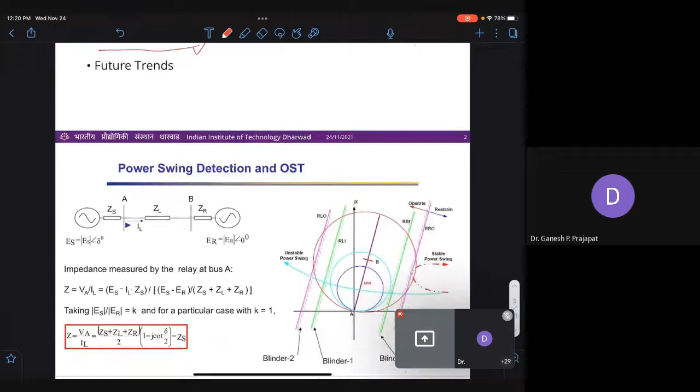Before going into AI applications to stability studies, let's discuss some basics first. Traditionally, how do we detect unstable events? Suppose you have a large power system with many generators.

Suppose after a fault, one area is separating out from the other area, so this area goes out of step with respect to the other. These two areas we can represent with two single machines, two sources. After a fault, if it is a stable fault, the oscillations or the angle difference will die out after a certain time. If it is an unstable fault and the system becomes unstable, the angle difference increases like this.

Now in traditional power systems, how do we detect this unstable case? If you have a relay here, say a distance relay, it can measure the distance, or impedance. You can see this is VA by IL, which is what it measures as distance.

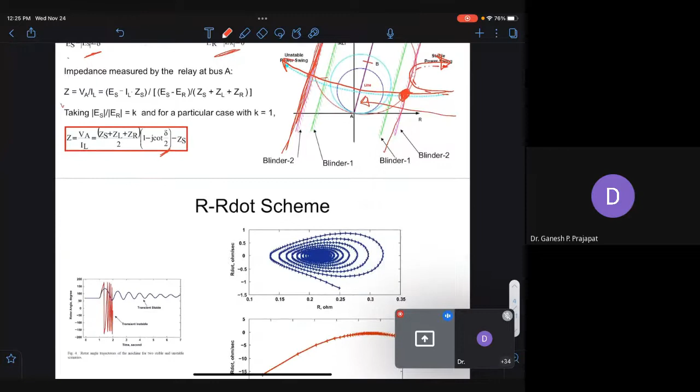Once it crosses this blinder, you can put a timer, and within a certain amount of time it will cross the other blinder. During a fault also it can enter here, so now we have to classify between a fault and an unstable swing. This is done using the R and R-dot scheme. Generally for a fault it will be very fast, and for an unstable swing it will be slower than that.

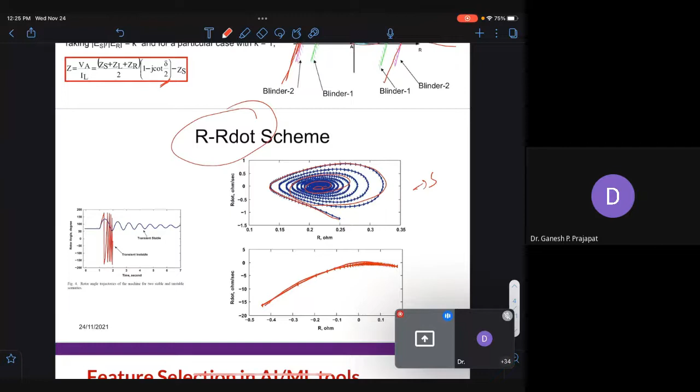For the R and R-dot scheme, you can see that for a stable swing, it looks like this. And for an unstable swing, the R and R-dot trajectory is different, where R is the resistance, the real part of the impedance seen by the relay.

So this is R, and the time derivative of this resistance is R dot. If you plot this, this is your stable case and this is your unstable case. So you can put a threshold to identify stable and unstable cases, and if it is unstable, you can separate the two areas.

If you have one area separating from another, suppose this is the out-of-step generator, and this is your stable area, so you can separate out these two areas. That is basically islanding. Now, because of renewable penetration, as the inertias are changing, your R dot, the time derivative of this resistance, will also change, because as the inertia changes, your oscillation frequency changes, and because of that you get this change in R dot.

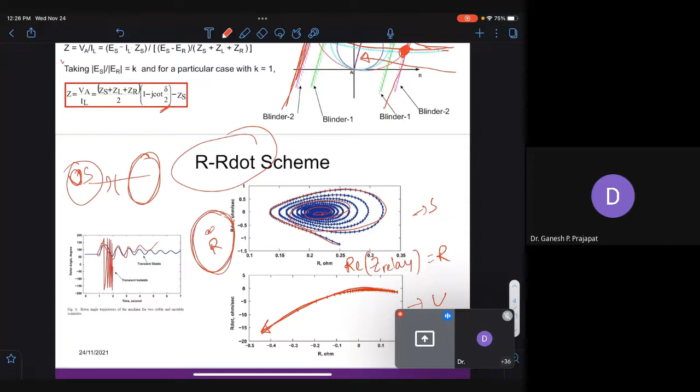So there are many difficulties to set a proper threshold now. We can use machine learning tools to identify whether the fault will be stable or unstable, that is, after a fault, whether the system will remain stable or unstable. Now, how do we select features in the artificial intelligence or machine learning tools? It needs some features, some measurement features you give, and then it gives you the stable and unstable status.

So here you can see this is a single machine. In fact, this is also basics. It is required to understand how we can use AI/ML tools in transient stability predictions. So here it is, you can see there is an SMIB case. So if you have a two machine system or two area system, one area is getting out of step from the other area.

So you can represent it with generators, and from a two machine system you can represent it with a single machine infinite bus equivalent. Now we are familiar with this equal area criterion.

Now you can see this is your P-delta curve pre-fault, and initially your mechanical power or electrical power is this one, PM. Initial angle is delta. If there is a fault in the middle of the line, you can see that during the fault your P-delta curve reduces to this. So mechanical power is this and electrical power is less, so the generator rotor accelerates. This is your accelerating zone.

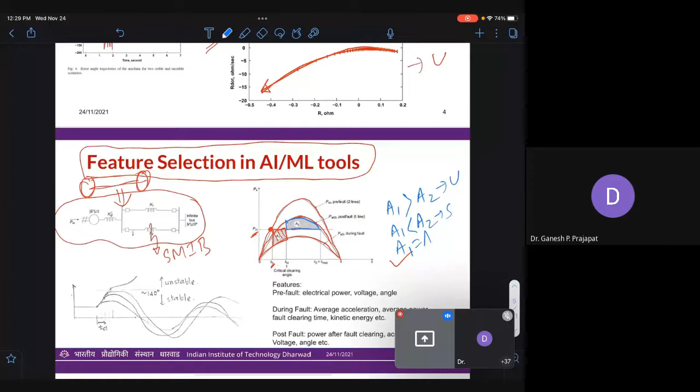Now, how is this relevant to feature selection with AI/ML tools? How do we know whether A1 will be greater than A2 or not? This A1 can be characterized by this mechanical power, this electrical power during fault, and this angle difference. So three things determine area A1: electrical power pre-fault, the average electrical power during fault, and this angle difference, delta CR minus delta 0, which depends on the fault clearing time.

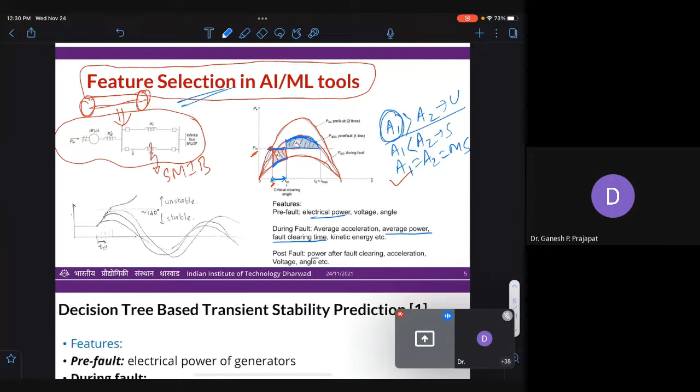Similarly, area A2 depends on a couple of factors: one is the electrical power after clearing the fault, and of course the mechanical power, that's the bottom part, plus electrical power pre-fault. Now, this electrical power after clearing the fault depends on voltages as well, right? So similarly, we can select voltage and angles, which also determine this pre-fault operating point as well as the post-fault operating point.

So these are the features used in machine learning tools: electrical power, voltage and angles, pre-fault and post-fault, and during fault we need the average electrical power, and sometimes average acceleration or kinetic energy. Not all features are used, you can use a subset, because generally if you use electrical power, you don't need voltage and angle, you'll get the same information even using only electrical power.

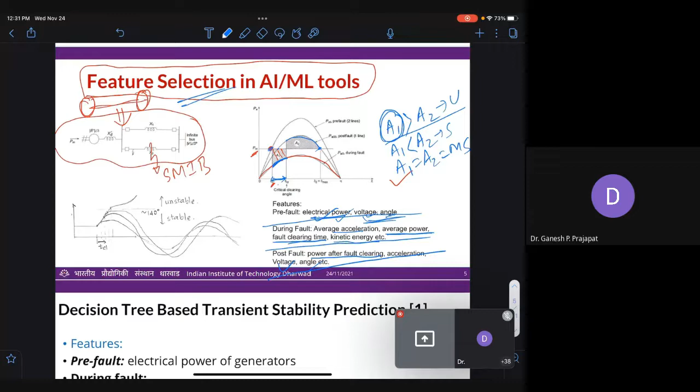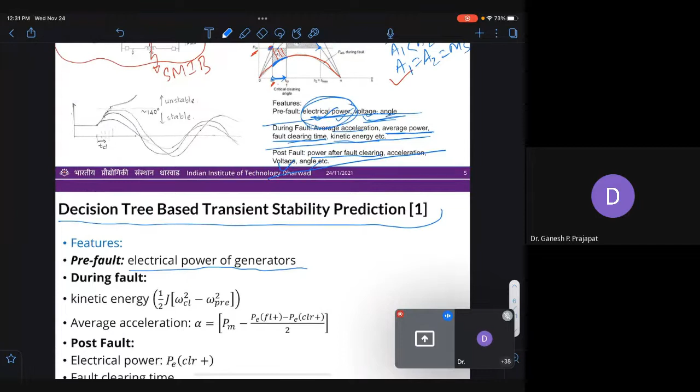So I'll give one example of decision tree based transient stability prediction. The features used are electrical power of the generators before the fault, you can see that feature. Then during fault, kinetic energy and average acceleration.

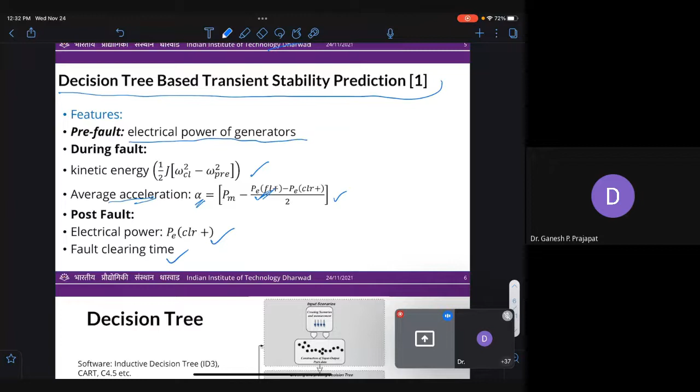When you use average acceleration, you can see that during fault your electrical power is also used. So basically we're using the same information, the during-fault electrical power, which is already used in calculating the average acceleration. Similarly, for post-fault electrical power and fault clearing time, these informations are used in the decision tree to predict transient stability. So how does the decision tree work?

You will have lots of simulation data. You'll be given power system operating data, loads and generation, and network information.

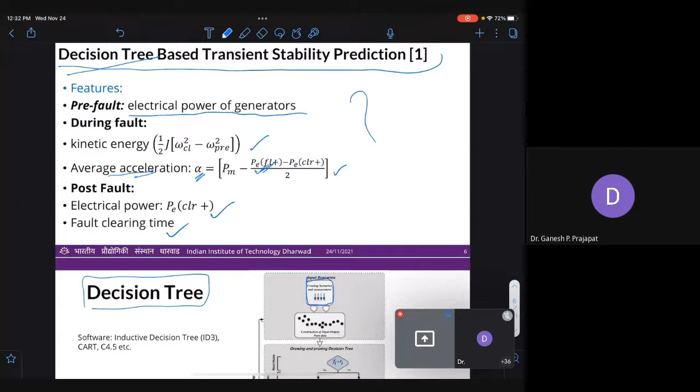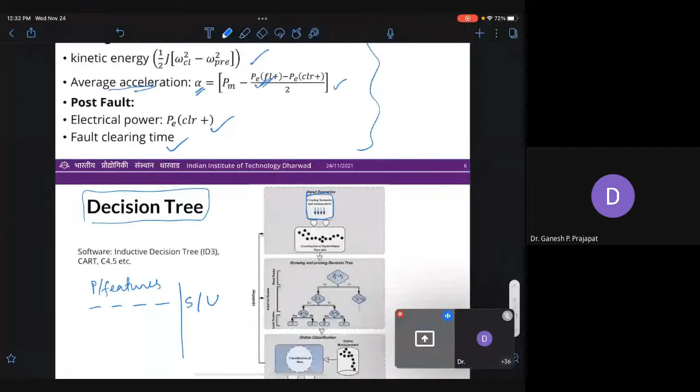So you will create many simulations, and for each simulation, you will calculate these features. Finally, after simulation, you will see whether it is a stable or unstable case. So you will have a number of predictors, and finally identify whether it is stable or unstable. Similarly, you will change the operating point, or create another fault and check. You calculate these features and see whether it is unstable or stable. You will create this database by doing thousands of simulations.

Then you can use software like C4.5, 5.0, or CART, which will give you a decision tree like this - an if-else kind of structure. So for one feature, if it is greater than a threshold Ti, you move in this direction; if not, you move in another direction. Finally, at the terminal node, you get whether it is stable or unstable. Now, if you have this decision tree, in real time, if you get some measurements, you can calculate these features and use them in the decision tree.

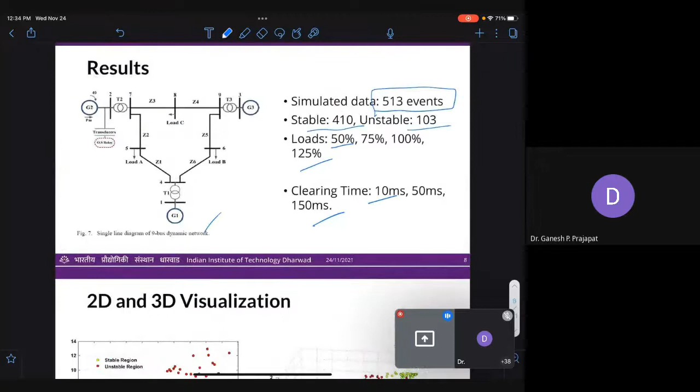It gives you the stability status of the power system, whether it will be stable or unstable. Now, this was tested on a 3 machine system. There are 513 simulation cases, with stable being 410 and unstable being 103 events. Loads were changed from 50% to 125%, and clearing time was changed from 10 milliseconds to 150 milliseconds. So a total of 513 events were simulated, and a decision tree was trained.

Now, if you use only two features - kinetic energy and average acceleration during fault - you can easily classify this: this is your unstable and this is your stable. But in this zone, it is difficult to classify using only two features. That's why you need to use multiple features, and then you will be able to train a decision tree properly.

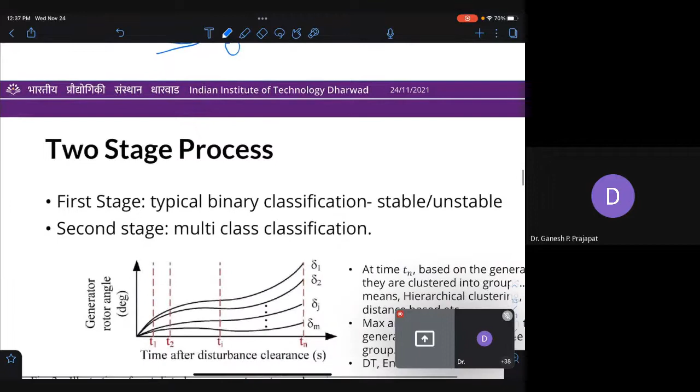So we need to know how the system behaves. This is a 2-stage process. The first stage is typically binary classification - stable or unstable. In the second stage, it is multi-class classification, where we need to know how the generators will behave. Suppose we simulate for around 20 seconds, which is sufficient and long enough to determine transient stability. So at 20 seconds, we look at how the generator rotor angles are clustered - for example, suppose generators 1 and 2 become unstable from the rest.

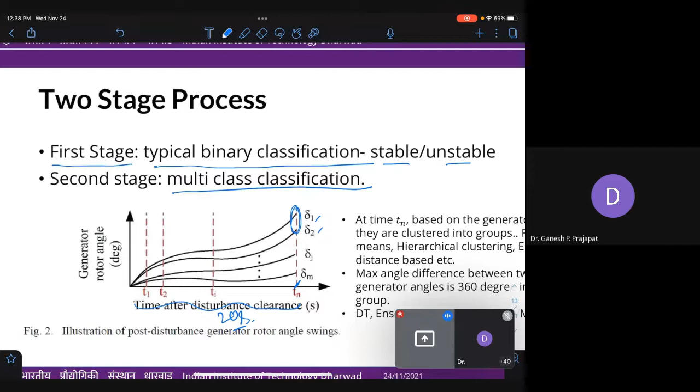So you will see that the angle of these two will be much higher than the other generator angles. After 20 seconds in the simulation data, we can classify and cluster the generators into several groups.

We can use fuzzy C-means clustering, hierarchical clustering, or Euclidean distance based clustering. We'll group these generators into different groups. Now the maximum angle difference between two generator angles is 360 degrees in each group, so within a group your maximum angle difference is 360 degrees.

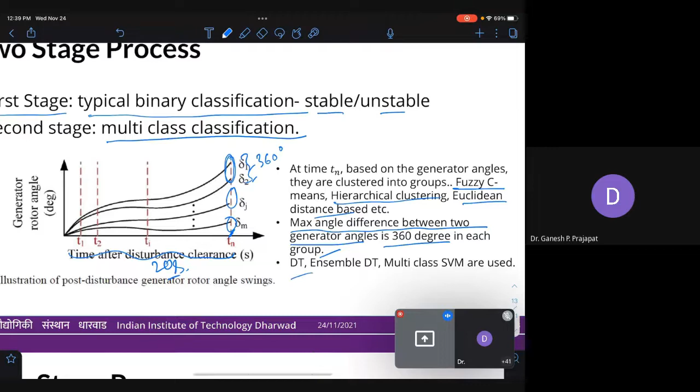You may have only one group, that is the stable case. For the unstable case, you have a minimum of 2 groups, and it can be more than 2 as well. We can use a decision tree or multi-class SVM to identify this multi-class classification.

So this is a two stage process, as we discussed. First, in the offline stage, you create lots of simulation data, and then you have two decision trees. One is your binary classification: stable and unstable.

If it is an unstable case, then only for unstable cases we can do this multi-class classification to identify the generator behavior. So we'll cluster the generators into different groups, and we'll have a multi-class classification model. It can be decision tree, SVM, or other machine learning tools.

Now in real time, if you have PMU data, it can give you the stability status based on this binary classification. If it is unstable, then based on this multi-class classification, we can identify which generators are going to be unstable, or how many groups are there in the power system.

Maybe 3 groups, with some generators in one group, some in the second group, some in the third group. In each group, the angle difference between two generators is maximum 360 degrees. This information will be useful to take a proper control action.

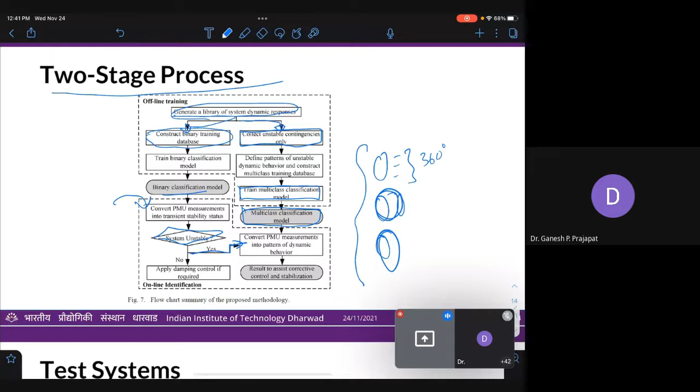So this is a 16 machine system, you can see. More than 7,000 events were simulated, and the mean fault duration was 13 cycles. That is relatively longer, but since the system was mostly stable, to get a sufficient number of unstable events, the fault duration was taken a little bit longer, 13 cycles.

And the simulation duration was 20 seconds, to capture the dynamic behavior of the system after fault clearing. And the predictors, suppose the generator angles are like this.

Now this is when the fault has occurred, and after the fault, at every cycle... one cycle in a 60 Hz system is around 0.0167 second. So every cycle, or every 0.0167 second, you have one data point.

So you can see that if you take 10 cycles of data, this is the data you use, and based on that you will be predicting the dynamic behavior till 20 seconds.

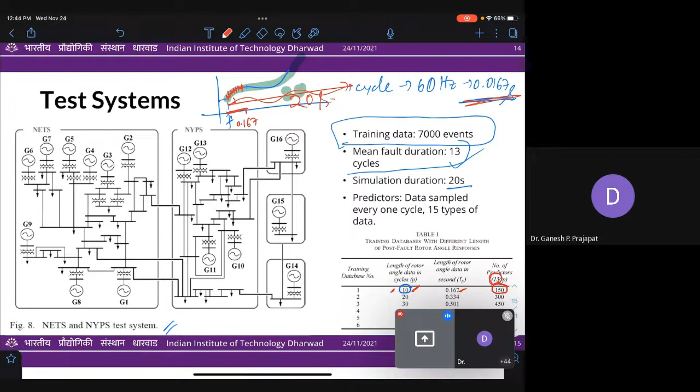So if it is generator rotor angle, for 10 cycles you get 10 data points or 10 predictors. Similarly, for generator speed, you get another 10. So with 15 predictors used in this work, you get 15 times 10, totaling 150 predictors.

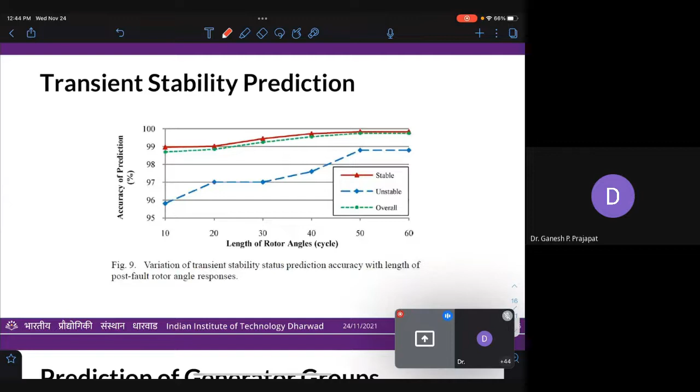Now the accuracy depends on how much data you are using. If you use only short duration data, your accuracy will be low. If you use long duration data, of course your accuracy will be higher.

If it is only 10 cycles of data, the total classification accuracy is around 99%, but for unstable cases your accuracy is around 96%. As you increase the data length to 20 cycles, or around 0.3 seconds, your accuracy for unstable cases is around 97%, and overall accuracy is around 99%.

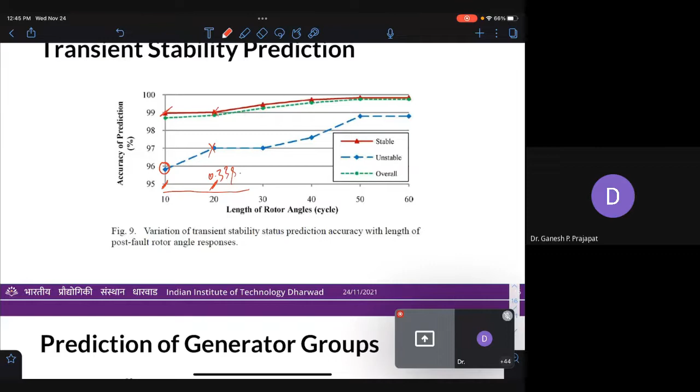Prediction of generator groups for unstable cases, how many generator groups there will be and which generators will be in each group, is relatively difficult classification. The reason is you may not have a sufficient number of training data sets, because the number of unstable cases is low. That's why accuracy is a bit low. Using the boosting technique, accuracy is around 89% using 10 cycles of data, and using 20 cycles of data it is around 90%.

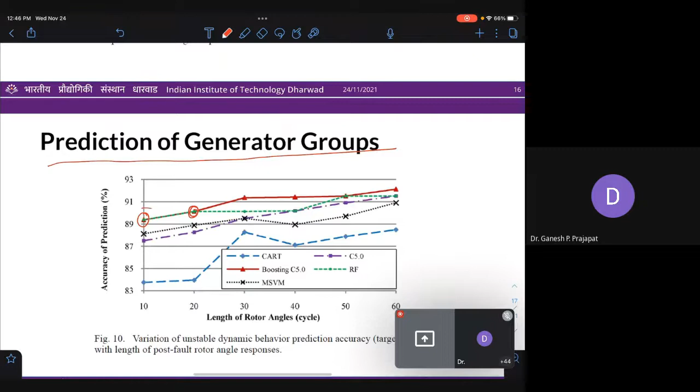Now, if you want to take control actions for transient stability, you have to take control action very fast. Typically the system becomes unstable after 1 to 2 seconds, and you have to take control actions in maybe less than 0.5 seconds. So as soon as you can take the control actions, you have a better chance of making it stable.

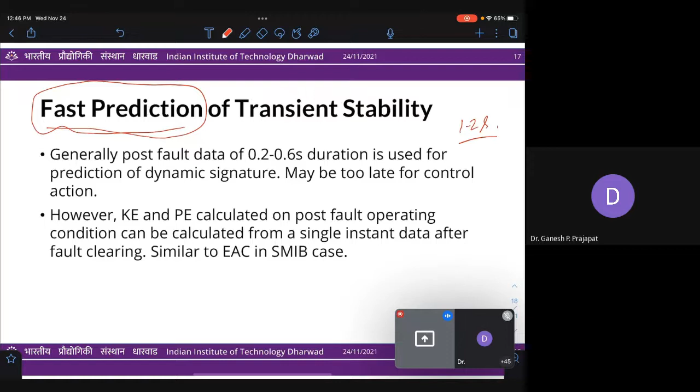So how to predict the dynamic signature very fast? We can use features from the transient energy function. This is like your equal area criteria in the multi-machine case. Equal area criteria is for SMIB. If you study the multi-machine equivalent of this, that is your transient energy function. If you calculate kinetic energy and system potential energy, you just need one instant of data, just like equal area criteria, to understand whether it will be stable or unstable. So you don't need to simulate it.

Similarly, in the transient energy function, just after fault clearing, if you know the network status, you can calculate the potential energy and also the kinetic energy. So you can actually tell whether it will be stable or unstable using just one time instant of data.

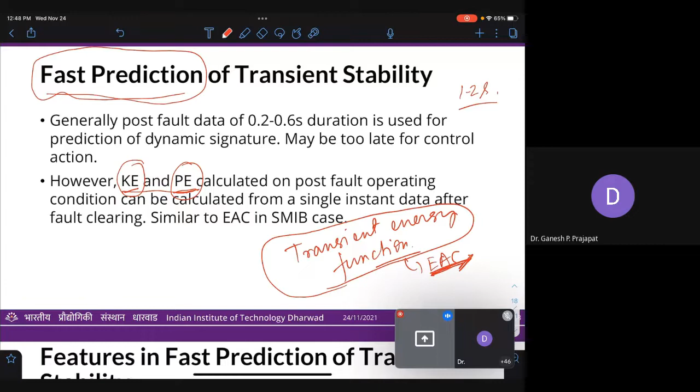Several features from transient energy functions are used in this case: energy margin, which is if you increase the energy by that amount it becomes unstable; then normalized kinetic energy, which is generator kinetic energy divided by the sum of all the kinetic energy, giving the distribution of kinetic energy among different generators; then total kinetic energy, then acceleration of the generators, and rotor angles.

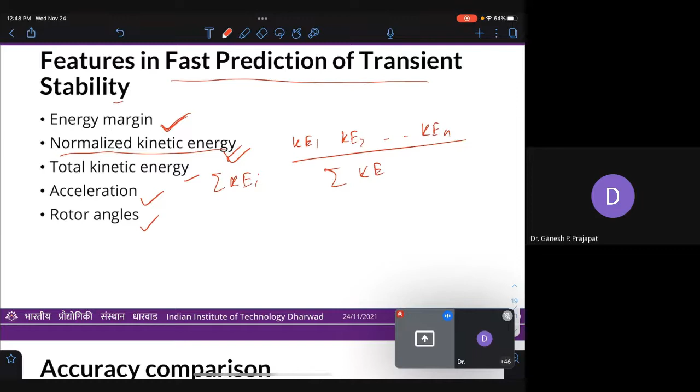These features are used for fast prediction of transient stability. When we use energy margin, kinetic energy, total kinetic energy, and acceleration, you just need one time instant of data, and your accuracy is 90%. In the traditional method, if you use 250 milliseconds of data, your accuracy becomes higher than 90%. But using the energy function, only one time instant of data can give you the same accuracy. So basically, you can predict stability status very fast.

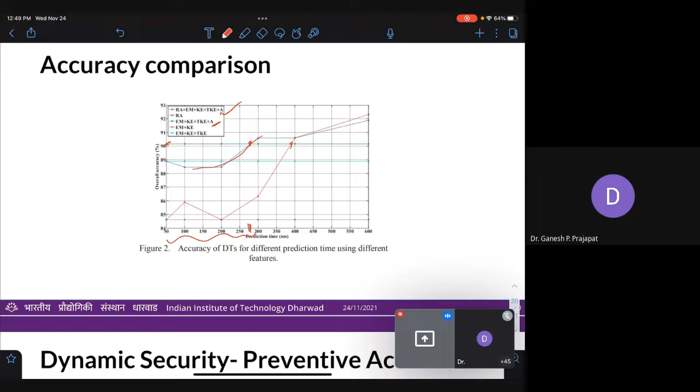So far what we have discussed is how to predict stability after a fault occurs, or how to predict the dynamic signatures of the system, how the system will behave after a fault occurs. Now there is something called dynamic security. Suppose the system is operating normally, if there is a fault, will the system remain stable? To know that, we do dynamic security studies.

Here there are two objectives: to predict dynamic security before any fault occurs, you have to check the steady state data and predict whether it will be secured or not secured. If it is not secured, you have to decide proper control actions. In this case, two decision trees are used: the observation decision tree and the prevention decision tree, that is ODT and PDT. The function of the observation decision tree is just to predict whether it will be secured or not secured. In the prevention decision tree, it decides the control actions or corrective actions to make it secure.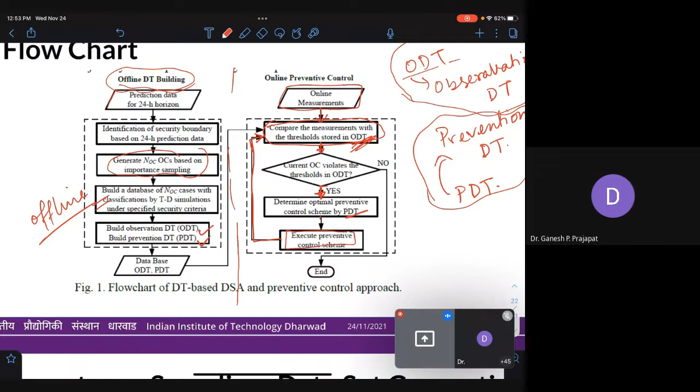Now for offline database generation, importance sampling is used. What it means is that generally you generate operating points randomly by changing the loads or generation within plus minus 10%, 20%, something like that. These are the operating points, and you can see that it is uniform.

In case of importance sampling, you can see this is your decision boundary — in this case it's unstable, in this case it's stable. Near the decision boundary you create more and more data so that your machine learning tool or decision tree becomes more accurate. If the operating point is far from the boundary, it's easy to classify as stable or unstable, but close to the boundary it becomes difficult, so we need to generate more data near this boundary.

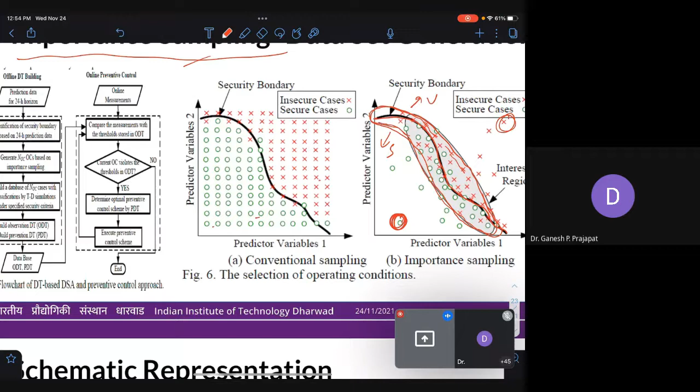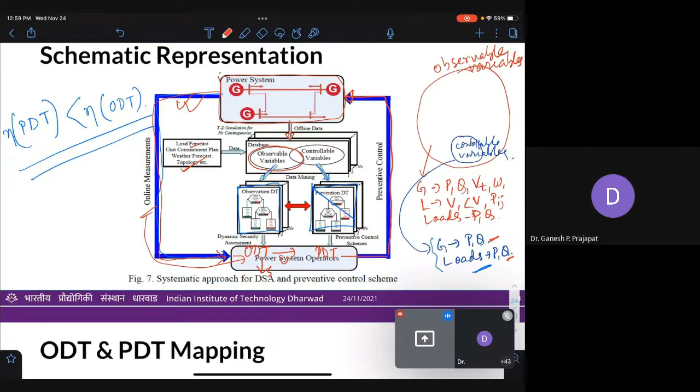You can do load shedding, which changes the measurements — line power flow and bus voltages will change. Based on these updated measurements, the data is again sent to the observation decision tree. As the observation decision tree has higher accuracy, it will classify whether it is a stable or unstable case, secured or not secured. Until you reach a secured operating point, the PDT will continue to take control actions.

So I'll give one example here.

So this was implemented in the Danish power system, and many generators were replaced with renewables, and renewable penetrations were increased from 20 to 40%.

So you can see that this is your observation decision tree, and this is your prevention decision tree. So in the observation decision tree, this is your Px2 y2 is less than 0.39.

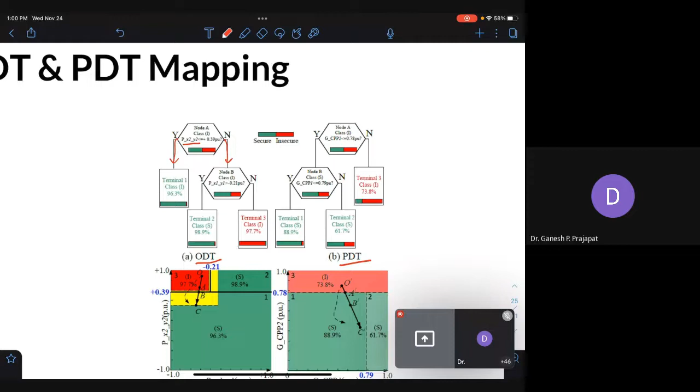So if it is less than, then it moves in this direction, and it is stable. If it is higher than that, then again you take Px1 y1. Px1 y1 is one particular line power flow, and Px2 y2 means some particular line power flow here. So based on that, you can decide whether it is stable or unstable. You can check it with this observation decision tree.

Your operating point is this one. Now you can check that your Px1 y1 is less than minus 0.21, and Px2 y2 is higher than 0.39.

So as it is higher than 0.39 for Px2 y2, we'll move in this direction, and then we'll check Px1 y1, which is less than minus 0.21. Here you can see it is greater than or less than. So it is not greater than, so we'll move in this direction, and you can see that it's an insecure case.

So as it is insecure, we have to take some control actions. How do we decide the control actions? The control action will be decided by the prevention decision tree.

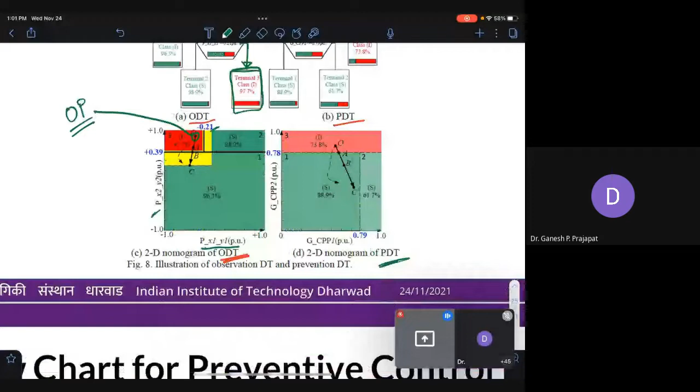In the prevention decision tree, your operating point is here. We have to take a control action such that it moves into the secure zone. So how do we move into the secure zone? This is insecure, and these are secured. So from this you can move in this direction, this direction, this direction, or even these directions. So where should you move?

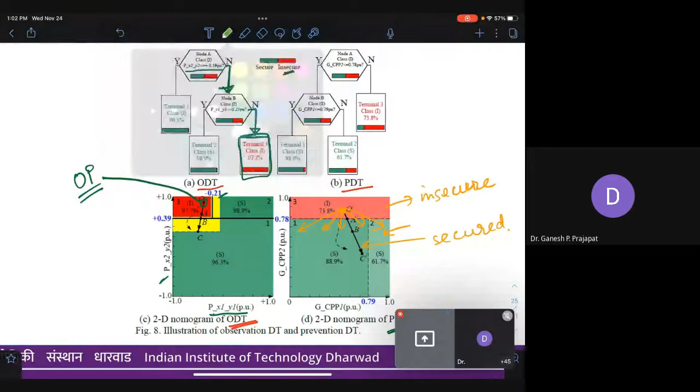You have to solve the optimization problem such that you minimize the total cost of generation. You do some equality constraint, so sum of all the generation change will be 0. That means somewhere you increase the generation, somewhere you reduce the generation, so that net generation and load balance is there. And it has to satisfy the inequality constraints. The output of a particular generator has to be within a certain plus minus range. But this range is not the generator's actual limit.

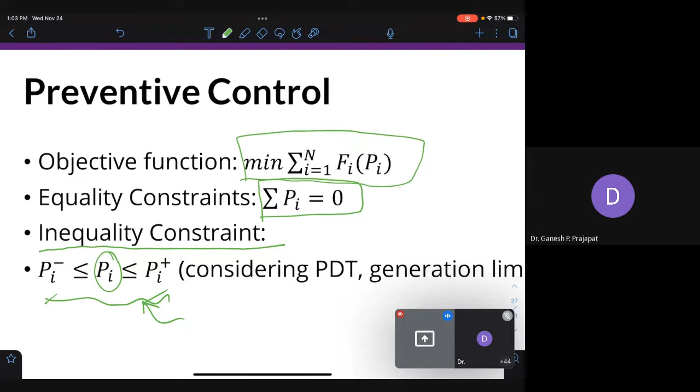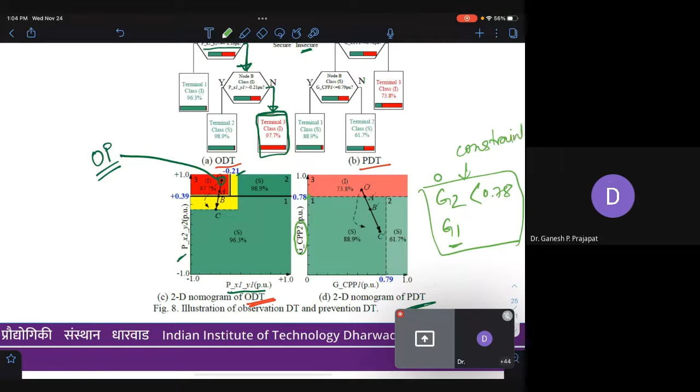This is what you get from this prevention decision tree. What it means is that here you can see that your operating point has to be such that your power plant 2 power has to be less than, so G2 has to be less than 0.78. Similarly, your generator 1 power is independent, so it can be anything - you can see this in the PDT. So your insecure case only changes when your G2 is higher than 0.78. So this is the only constraint, that your G2 should be less than 0.78.

So now we have to solve the optimization problem so that cost of generation will reduce. Sum of this delta P has to be 0. So if you have only two controllable generators, G1 plus G2 has to be 0 - this is delta G1 and delta G2. And generator 2 should be less than 0.78, and it should be higher than the generator's own minimum limit.

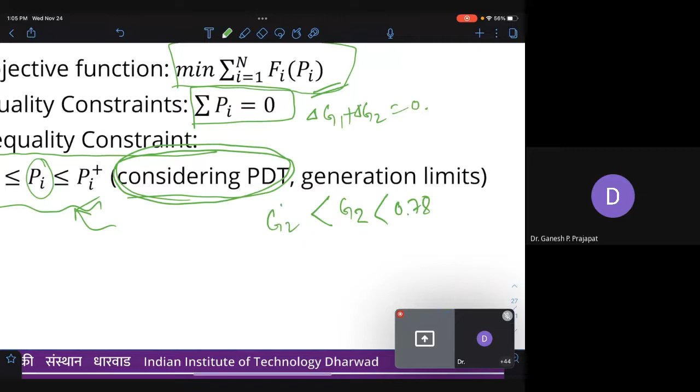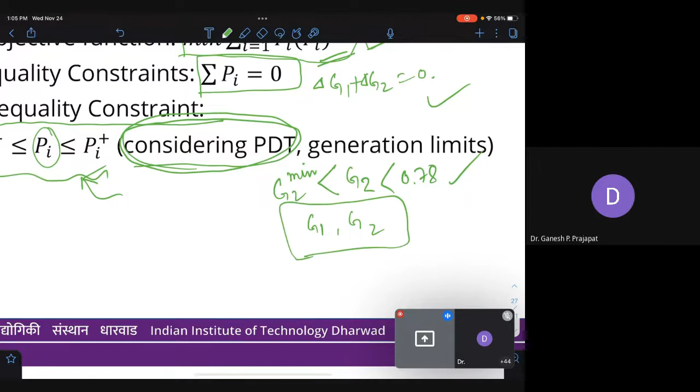So if you solve this, minimize this objective function subject to these two constraints, you will finally get what should be the value of G1 and G2, or power output of generator 1 and generator 2. So that you have got here.

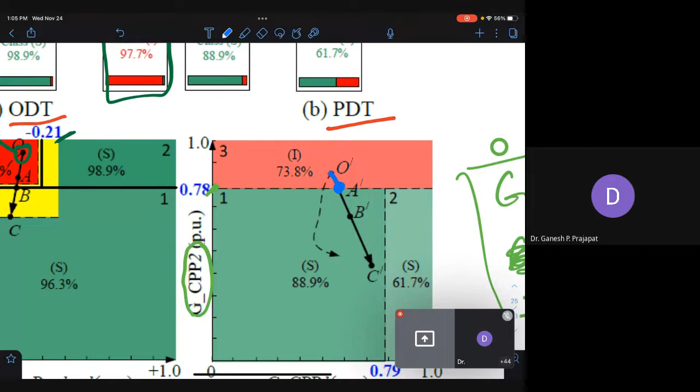So you can see that this you get from the optimization, A dashed. So you are moving from O dashed to A dashed here. And once you take that control action, your power system variables will change, your line power flows will change. So in the observation decision tree, you shift from O to A only.

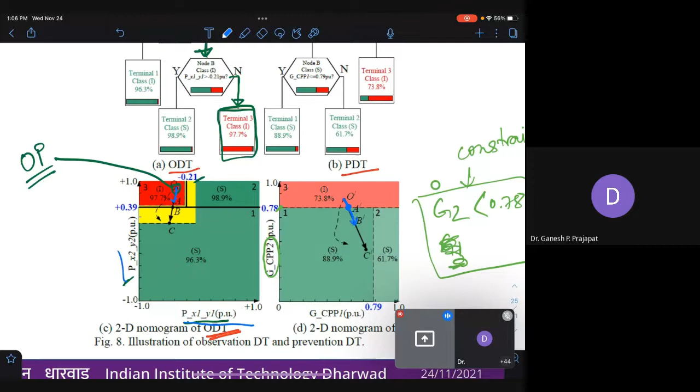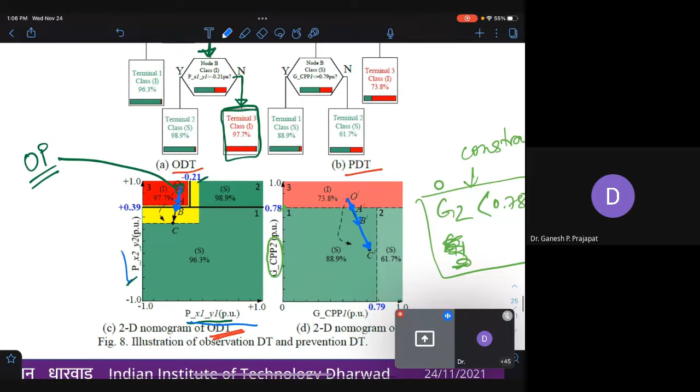So as per the observation decision tree, you can still see that it is in the insecure zone. So in the same direction, in the prevention decision tree, we'll take further control actions, and in the observation decision tree it moves from O to A to then again B. It is still near the boundary, so we'll take further control actions from B dash to C, and then you can see that we have moved to the secured zone.

So finally, what we get is that your conventional power plant CPP1, in power plant 1, your generation should be this much, and your generation 2 output should be this much.

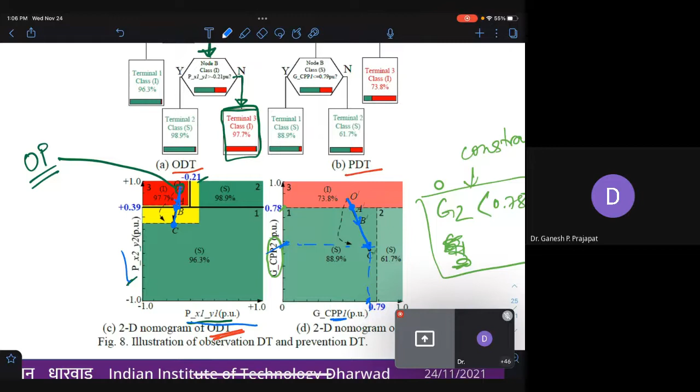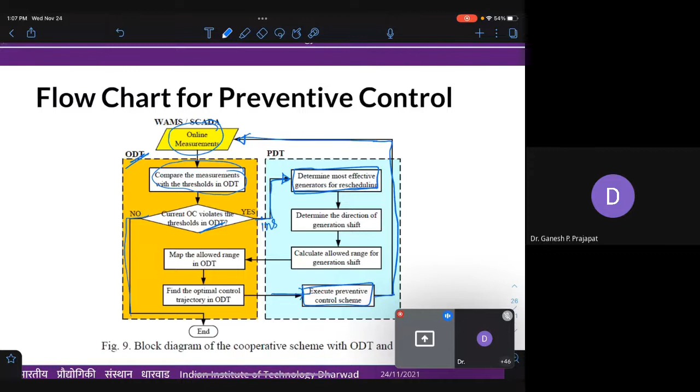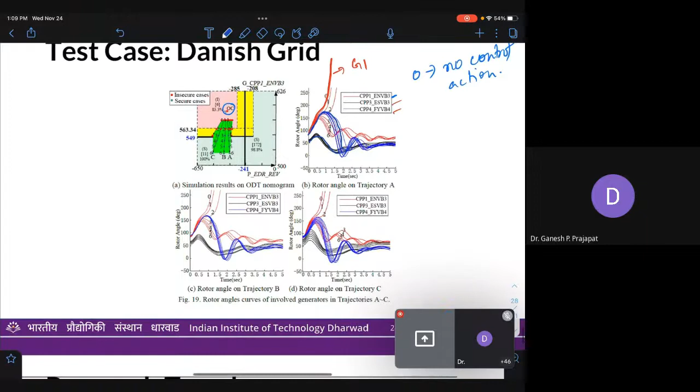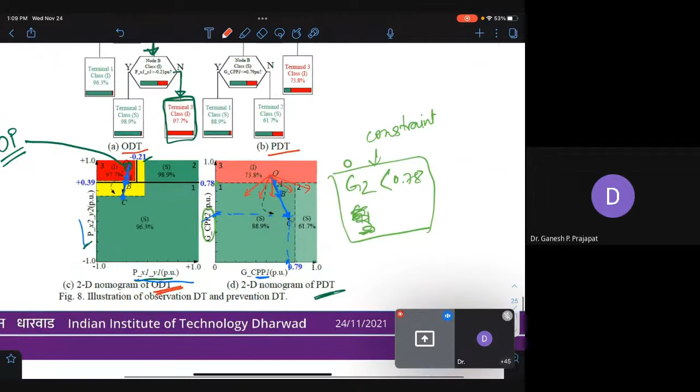Now, once you take a control action, you can take it in different directions. As discussed earlier, control actions from the PDT can be taken in this direction, this direction, this direction, this direction, or this direction. You will finally get it from the optimization based on the constraints and objective function. Since generator cost curves and such are not included, a few cases have been studied here, where the prevention decision tree takes control actions in 3-4 directions. So this is one direction, this is another, this is another, this is another. A, B and C are three different directions of control action.

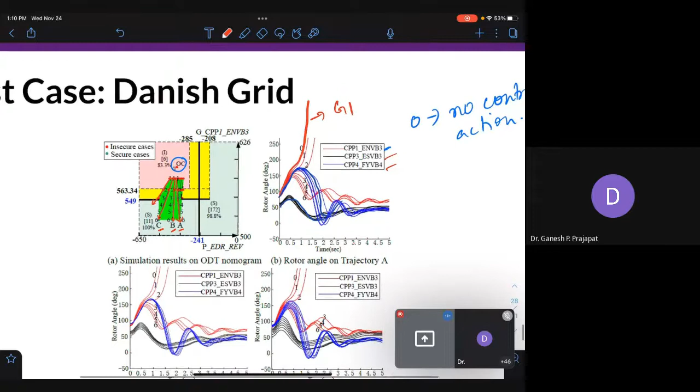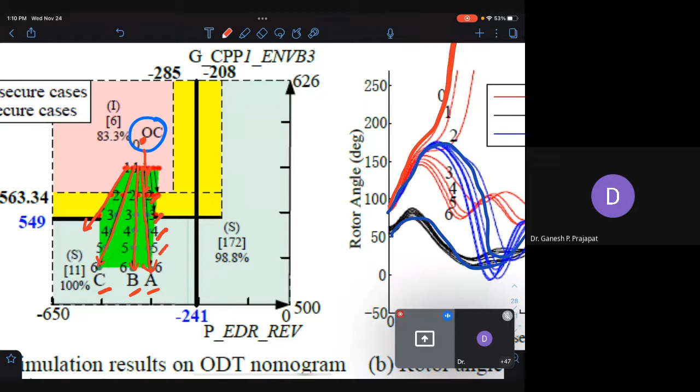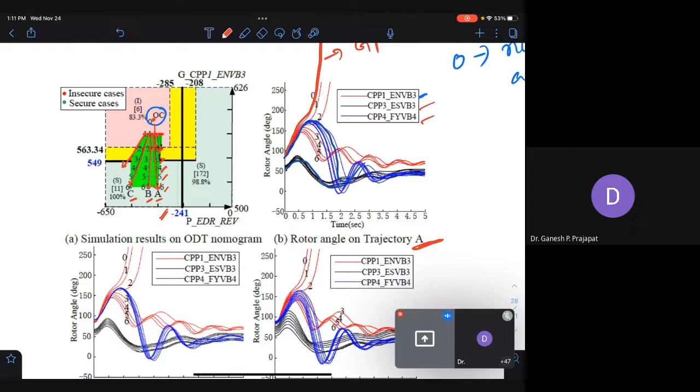You can see here this is trajectory A. As you take control action, 0 means no control action, then 1 means you have taken some control action, then you increase it to reach point 2, then point 3, point 4, 5 and point 6. Once you cross this point 3, it becomes stable. Similarly, in the simulation case, once you take the first two control actions, it is unstable. Once you reach point 3, it becomes stable. So this is a stable operating point.

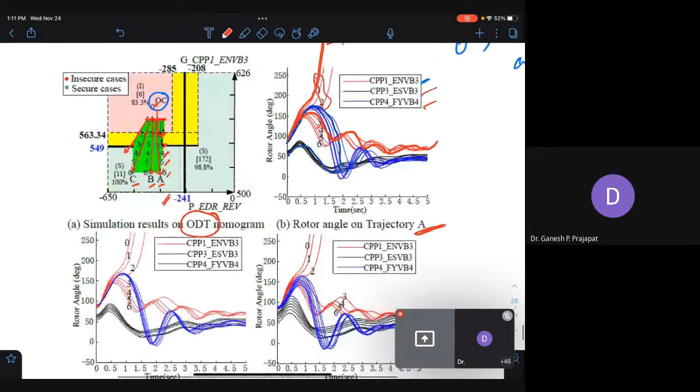So what it means is that the prevention decision tree can decide the control actions, and from the observation decision tree you can see whether the control action is successful or not. Until the observation decision tree predicts that it is secured, the prevention decision tree will keep taking control actions. So whether you take control actions in direction A, B or C, in all three cases they are able to stabilize the first generator, this conventional power plant one.

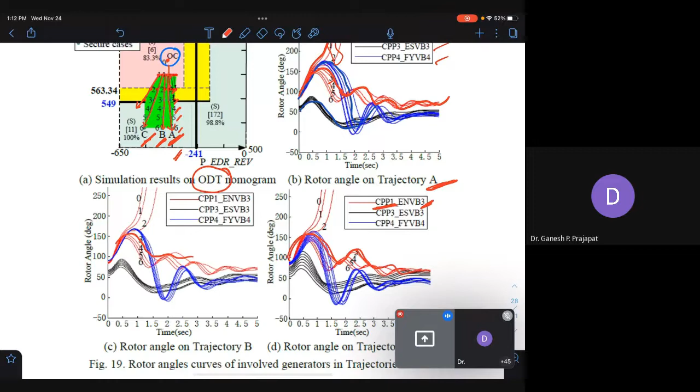Now, as per the research trends in AI/ML applications for transient stability prediction and control, the question is: suppose you miss some PMU data. That is very common because you need PMU data from multiple locations. If you miss some PMU data, how will you handle that situation? How will you use it in the decision tree or other machine learning tools?

The second question is, in supervised machine learning tools you need simulation data, and that simulation data has to be generated from a relevant operating condition. By relevant operating condition I mean, suppose you want to predict stability status after a fault, but the offline data you generated has to be relevant to the current operating condition. For example, you create a decision tree on the US grid and use it on the Indian grid -- that information from the US grid is not applicable here.

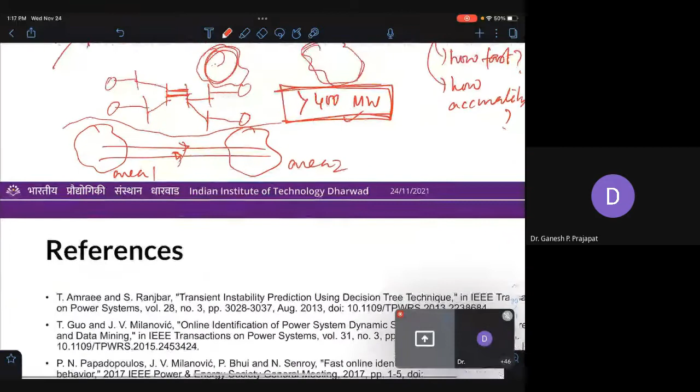These are research trends in AI and ML applications in transient stability prediction and control, and also dynamic security prediction and corrective actions. These are some of the papers that I have followed.

This is the first paper we discussed, using decision tree to predict transient stability, and then dynamic signature prediction - how the system will behave after fault is cleared, maybe 20 seconds after fault clearing, so which generators are going to be unstable and which will remain stable.

And then how do we identify the dynamic behavior very fast? We discussed that we can use the energy function approach, and we can take features from the energy function to predict it very fast.

And this energy function, the features we can use from the transient energy function, so that is like equal area criteria in multi-machine case.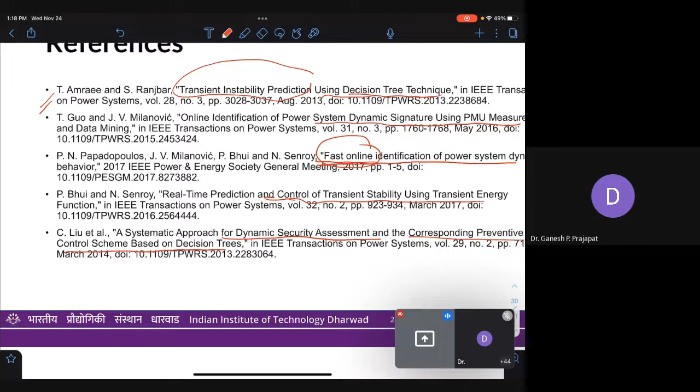And then dynamic security assessment and corresponding preventive control action. Here we discussed how to predict dynamic security and then take control actions to make it secured. Okay, so any questions so far?

Any questions so far? Ganesh? Hello? Pardon, your voice is not clear. Hello? Hello? Prajapat, are you there? Yes. Hello? Yeah, Prajapat, this is Bina Karmakar.

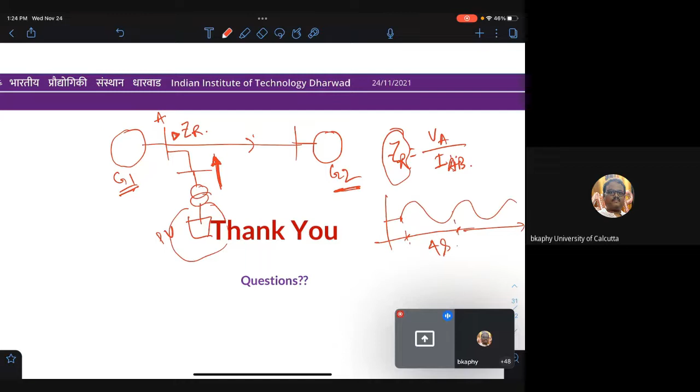Suppose earlier your angle difference was like this, and this time period is suppose 4 seconds, which is 0.25 hertz. Now, suppose earlier here it was a conventional generator and it has been replaced with a PV. So as this inertia has reduced, you may see faster oscillations, meaning the oscillation frequency can increase.

So you may see oscillations like this, maybe a bit higher frequency than what you have drawn. Now, if you calculate the R dot, if you just take the derivative of the real part of this ZR, now as the frequency has increased, you may see a higher value of R dot.

But again, we have to see how much power is given by the renewables, and whether they are added without replacing the conventional generators, or they have replaced the conventional generators. So many factors will influence what R dot curve we will get after the renewables are included.

So there is no simple yes or no kind of answer. What I suspect is that if there is more renewable penetration than participation from G1, there may not be such oscillations, meaning maybe that is damped out by those converters a little bit.

Converters will not automatically damp out oscillations unless you have some sort of supplementary control. That's true. Supplementary control so far is not in place, at least not in India, it's still in research stage. So generally they are operating it in maximum power point mode, or maybe power factor control mode only. They are not damping the oscillations or participating in stability controls.

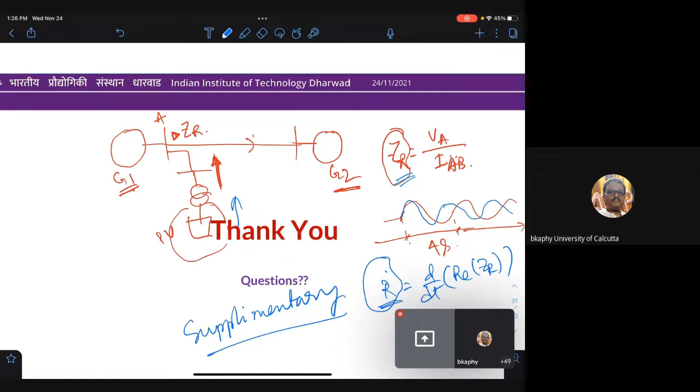Nice talking to you after a long time. So you are still in NIT Agartala, right? No, no, I left NIT Jamshedpur, I was in NIT Jamshedpur, now I am in Calcutta University. Oh, I thought you were teaching in NIT Northeast. No, I was in NIT Jamshedpur previously. I left, now I joined University of Calcutta. Okay, very good.